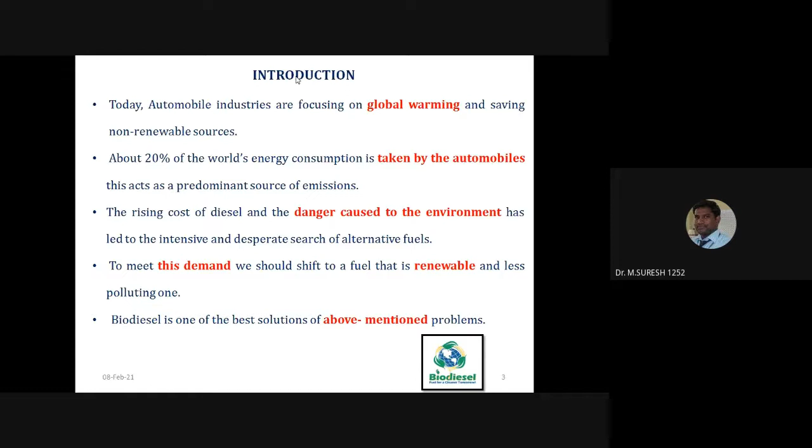Before using any kind of biodiesel, whether edible or non-edible oil, we have to find out the free fatty acid, that is, FFA content. Based on the FFA content only, we have to decide on the biodiesel production process. There are different methods which can be used for this production process, but among the major things we need to check is a titration process called free fatty acid determination.

Use of edible oil for the production of biodiesel can lead to food shortage and other problems. Therefore it is essential to search for non-conventional feedstock like non-edible oil. We need to use non-edible oil compared to edible oil, and also the cost of non-edible oil is very less compared to edible oil.

Huge consumption of fuel oil is outmatching the supply. So we need to switch over or use alternative fuels with properties that, if not identical, are at least comparable to petroleum based fuel. That becomes the need of the hour. So basically, biodiesel is the most promising among alternative fuels.

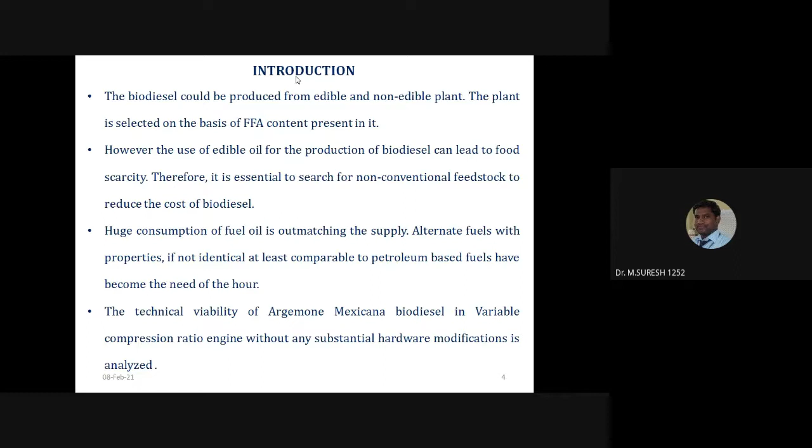Finally, the technical viability of Argemone Mexicana biodiesel in VCR engine. Normally all the research scholars and scientists are doing research in constant compression ratio, but especially for this research work, we focused on variable compression ratio without any modification, that means without any engine modification.

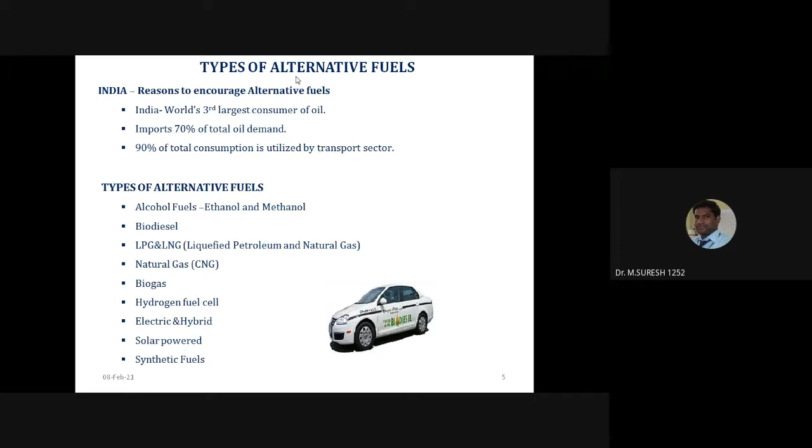The next slide shows different types of alternative fuels which can be used for internal combustion engines, and India's reasons to encourage alternative fuels. There are three things: India is the third largest consumer of oil, and also imports 70% of total oil demand. The next, 90% of total consumption is utilized by the transport sector.

We can look at different types of alternative fuels available, but mostly we have been using biodiesel without any engine modification, and also directly we can use it in diesel engines.

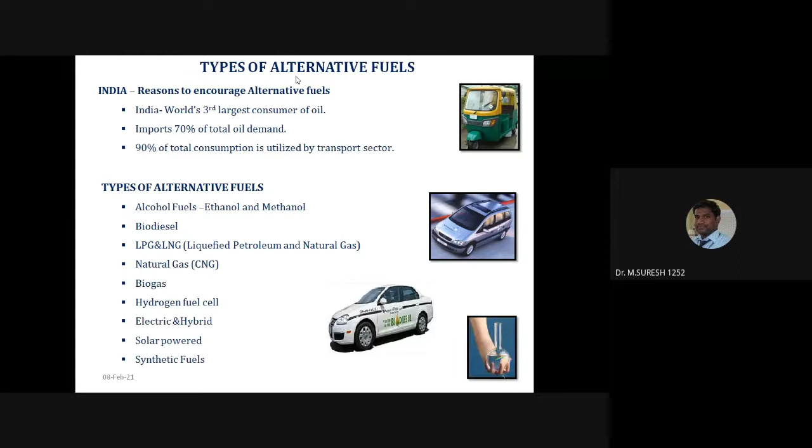This is the main research motivation. If you look at this research motivation, generally for biodiesel we can call it E3, which is nothing but Energy, Employment and Environment. So basically we need to focus on environment and also reduce the emissions.

We can see in this picture easily that if diesel or liquid fuels run on an internal combustion engine, after the exhaust stroke all the unwanted gas goes to the ventilation and those gases create more pollution to the environment. This more pollution affects health and causes global warming and ozone layer effects. To avoid these things, we need to switch over to biodiesel.

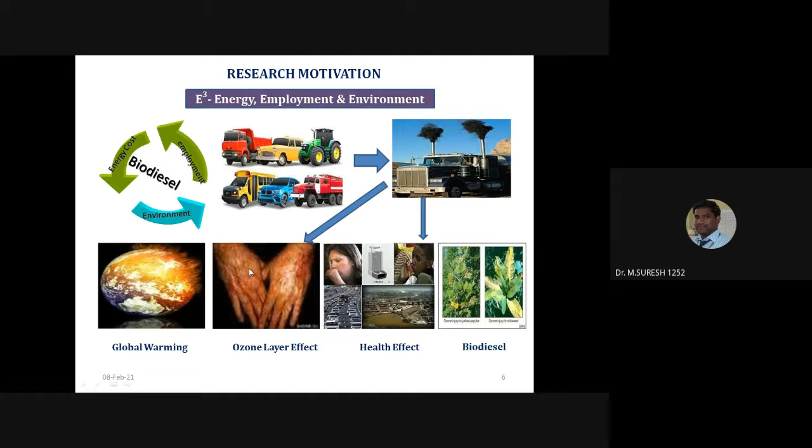General overview of biodiesel: as we all know, biodiesel is the name of a clean burning alternative fuel which can be produced from domestic or renewable sources. Biodiesel contains no petroleum, but it can be blended at any level with diesel to create a biodiesel blend.

Normally we have been using this biodiesel at B20%. If we use B20%, engine performance and emissions can be reduced, and combustion characteristics also get improved compared to other blending ratios. When we are going to use B100 or B50, we have to do some engine modification.

Generally for biodiesel, there are different methods to convert raw oil into pure biodiesel, but normally we use a chemical process called transesterification. Why do we use this transesterification process? Because it converts into two products, one is biodiesel and the other is glycerin. This glycerin we can use directly for the soap industry, and biodiesel we can use for internal combustion engines.

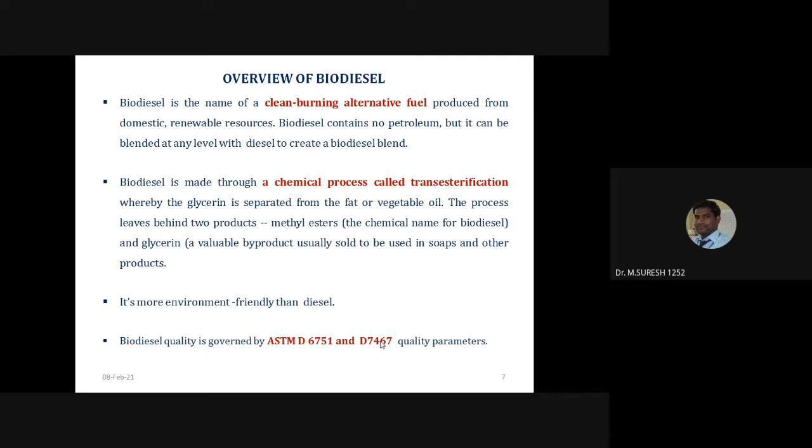If you look at advantages, first one is reduction in toxic engine emission, because biodiesel contains more oxygen. This leads to reduction in toxic engine emission, and also no sulfur dioxide emission, which means reduction in acid rain problem.

Then greater lubricity, which has improved engine performance and engine life. Also, because of the higher flash point of biodiesel, it provides improved safety of operation.

Other general advantages: it is non-toxic and biodegradable. Biodiesel is a renewable fuel, and it reduces exhaust emissions when compared to diesel fuel. Biodiesel is also safer to handle compared to diesel fuel.

There are some disadvantages which can be included in biodiesel: higher viscosity, lower energy content, higher cloud point and pour point, and greater engine wear.

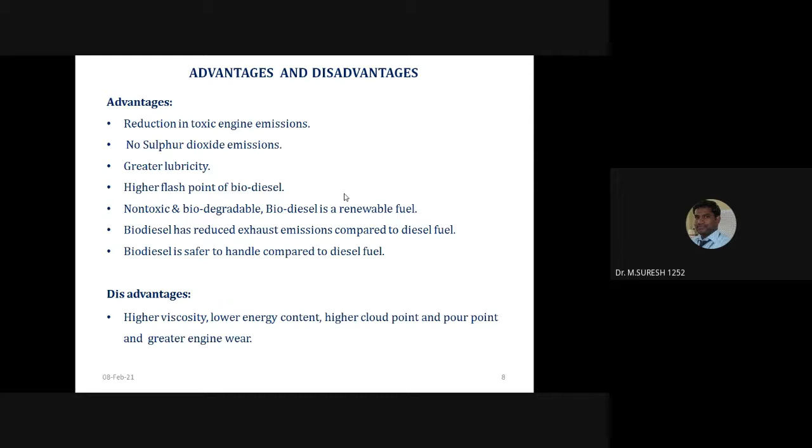If we use the trans-esterification process in biodiesel production, definitely viscosity may be reduced, and free fatty acid content will be reduced. Based on those two factors, we can do further processing and blending B10, B20, B30, or B100, whatever, so we can use it for internal combustion engines.

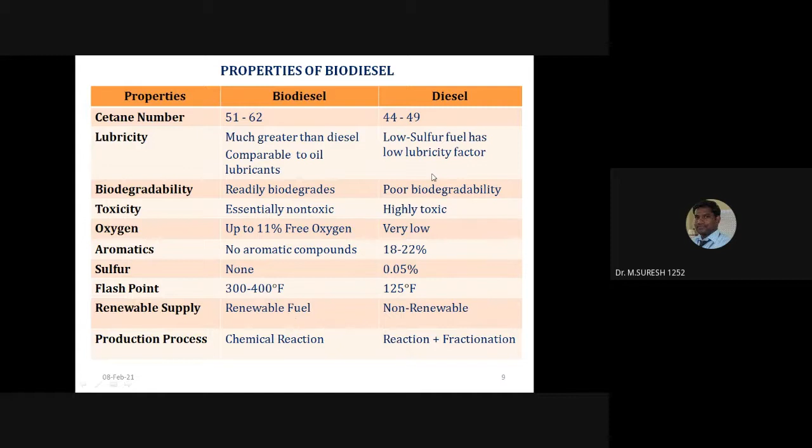We already know oils like jatropha oil, karanja oil, mahua oil, rice bran, neem, kusum, kokum, and sal oil. Out of all these oils, general research work has been carried out using constant compression ratio engines and also variable compression ratio engines.

From the inferences from the review of literature, we collected different papers through different sources, followed by reviewing all the journals. What is the main inference from this review, particularly for Argemone oil?

Looking at Argemone oil biodiesel, from the above research studies it's clear that biodiesel is one of the major alternative fuels which could be used for internal combustion engines with or without modification.

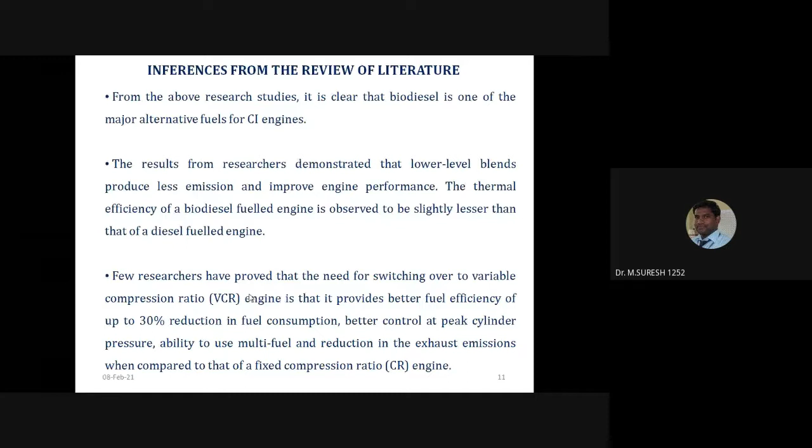This is the main significance of variable compression ratio, why we use it for internal combustion engines. With this technology we get better control of peak cylinder pressure, ability to use multi-fuel, and reduction in exhaust emission compared to fixed or constant compression ratio engines. There are also a few other inferences from the review of literature.

The research from the prior work clearly demonstrated that lower emissions were attained by the usage of biodiesel, except in the case of NOx, which slightly increased compared to diesel owing to the high peak temperature. It's also clearly shown that a VCR engine offers the potential to increase combustion efficiency and reduce the ignition delay under varying temperature,

and also other parameters such as ignition delay, pressure and cylinder crank angle. So we need to use variable compression ratio for biodiesel. It could be better to improve engine performance and also reduce engine emissions. Next, what is the reason behind that?

Argemone biodiesel. So Argemone Mexicana, or Mexican poppy. What is the need to choose this biodiesel for internal combustion? Those are the literature surveys and other factors. If you look at this Argemone Mexicana, it is locally available, grows with wild plants, can be grown on wasteland, is easy to propagate, and moreover this Argemone biodiesel will create employment opportunities for tribal people in tropical regions or

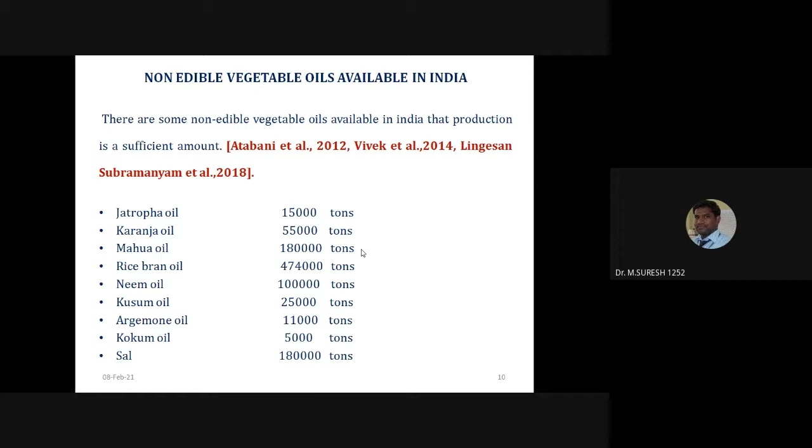There are different non-edible vegetable oils available in India. Those oils can be used for biodiesel. But the significant factor of this Argemone oil is that it gives very low free fatty acid compared to other non-edible oils. So when we use this Argemone biodiesel, it could help reduce biodiesel production cost and also improve engine performance as well as emissions.

Some key points have also been observed: biodiesel production from Argemone Mexicana will minimize the trade gap by reducing imported petroleum. It will become a channel of income generation for farmers by selling the seed, which is unwanted to the farmer. And other things like harvesting and slashing give great job opportunities for farmers in the process of cultivation.

So this is the main reason we chose Argemone seed, or Argemone biodiesel, which we directly used as fuel in the internal combustion engine. Before going into the production of Argemone, let's look at the variable compression ratio engine. You know constant compression ratio.

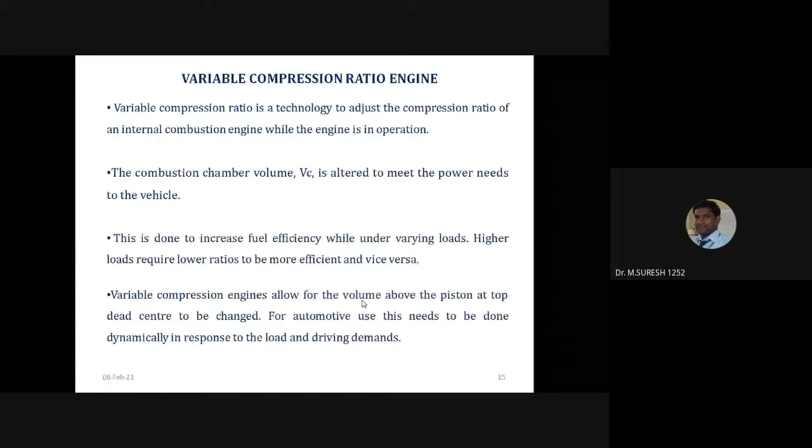Most research work is carried out using variable compression ratio because oil prices increase and car buyers have increasing interest in fuel economy. So in engine terms we should know about fuel economy. So it's better to switch over to variable compression ratio technology compared to constant.

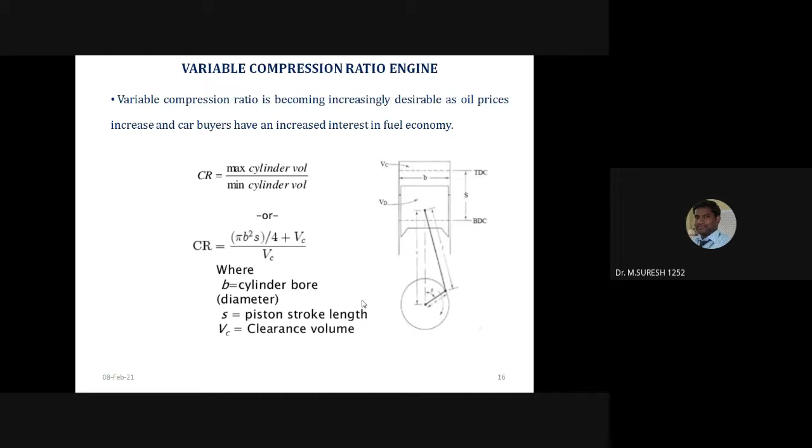If you look at the advantages of the VCR engine, the main reason for switching over to a VCR engine is that it provides better fuel efficiency, as we discussed, up to 30% reduction in fuel consumption, better control of peak cylinder pressure, and the ability to be a multi-fuel engine. A multi-fuel engine can directly use biodiesel and diesel, compared to constant compression ratio.

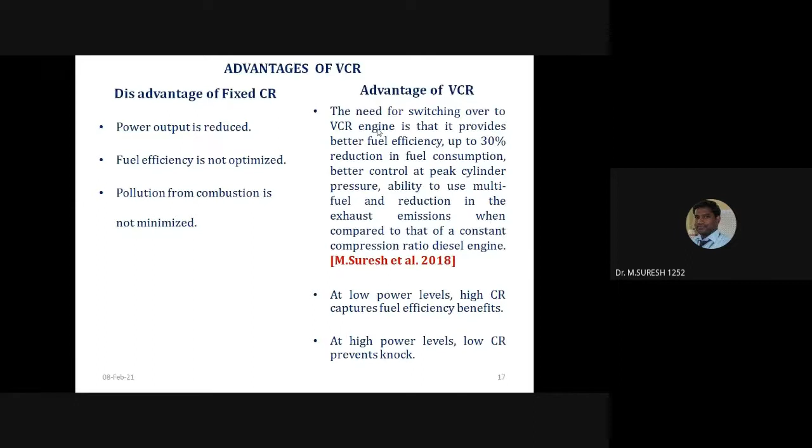And also we can look at some advantages of variable compression ratio. At low power levels, high CR produces a fuel efficiency benefit, and at high power levels, low CR prevents knock. So this is the main factor for using the new technology of variable compression ratio.

So this is also one kind of seed. From the seed we can get raw oil and convert it using different biodiesel production processes. Then finally we can use this Argemone mexicana biodiesel in a diesel engine. Argemone mexicana is also known as Mexican prickly poppy.

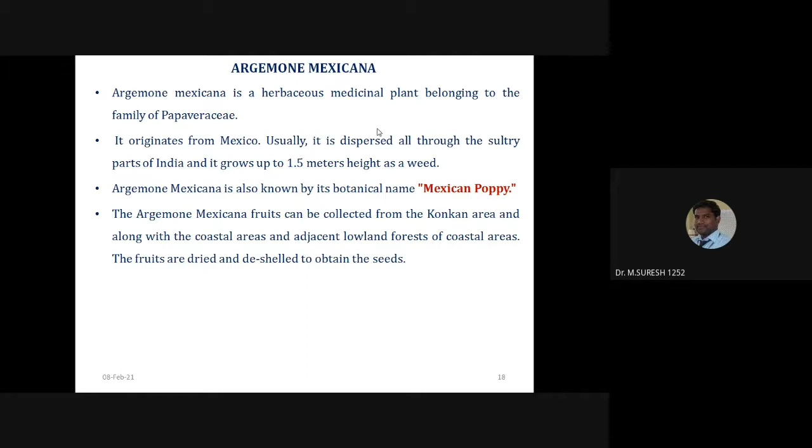Generally, Argemone mexicana fruits can be collected from the Konkan area. We collected fruits from Pune, and we converted them by the basic process we call the transesterification method, and we can use this fuel in an internal combustion engine. This is the significance of biodiesel from Mexican prickly poppy.

With the same oil, what we did was use a variable compression ratio engine, adjusting different parameters to find engine performance and emissions. That is the outline of the Argemone oil. Now we can enter the production of biodiesel.

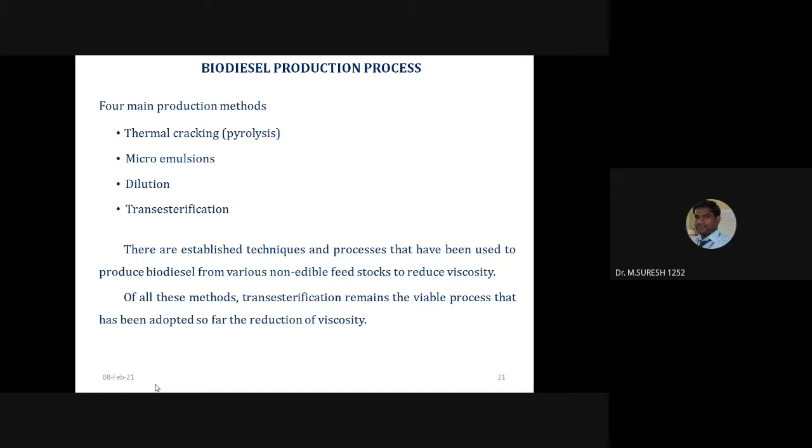So based on the reaction, the base catalyst reaction method could be used for the biodiesel production process. And this is the general transesterification process. If you look at the left side, any oil, like non-edible oil or edible oil, and alcohol. So we have to use an alcohol like methanol or ethanol.

So suppose we are going to use ethanol, we can produce biodiesel with bioethanol, or in case we are going to use methanol, we can produce biodiesel with methanol. So with respect to catalyst, normally we have been using NaOH and KOH for this biodiesel production. So you know KOH, caustic potash, and NaOH.

When compared to NaOH, KOH is more forgiving on high titration oils. With high titration oil, more yield is produced for biodiesel, and also high titration oils make a lot of soap. So that's why we have been using KOH as the catalyst instead of NaOH.

So what we mean by the transesterification process is the process in which edible or non-edible oil is allowed to chemically react with alcohol. So when we use oil or fat plus alcohol with any catalyst, we get two products. One is glycerin, the next one is pure biodiesel. So biodiesel is produced through a process known as transesterification. So this is the simple equation.

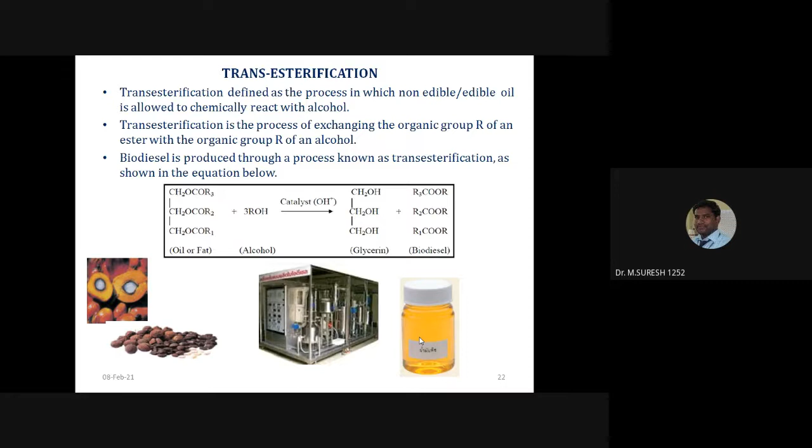And finally, pure biodiesel is produced by the various methods, and we analyze the properties of the diesel as well as the biodiesel. And this is the general preparation of the biodiesel. As I already told, when we add methanol, it is called methyl ester. When we add ethanol, the biodiesel is called ethyl ester.

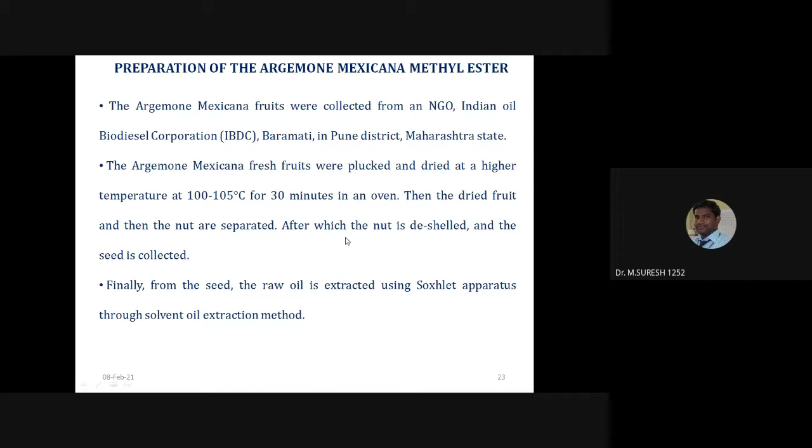So normally this seed we collected from Pune, from the Indian Biodiesel Corporation. It is located in the Baramati village area, and a temperature limit has been maintained. Initially the seed has been converted into raw oil. From the raw oil it has been converted into pure biodiesel by using the Soxhlet apparatus. By using this Soxhlet apparatus, we need to check the free fatty acid also.

So what do you mean by free fatty acid calculation? Before using any type of edible or non-edible oil for biodiesel, we need to check the free fatty acid. If we need to check the free fatty acid, which method do we have to use, based on the different types of biodiesel production? So for this biodiesel, we need to use the Soxhlet apparatus. After the Soxhlet apparatus, we found the free fatty acid value.

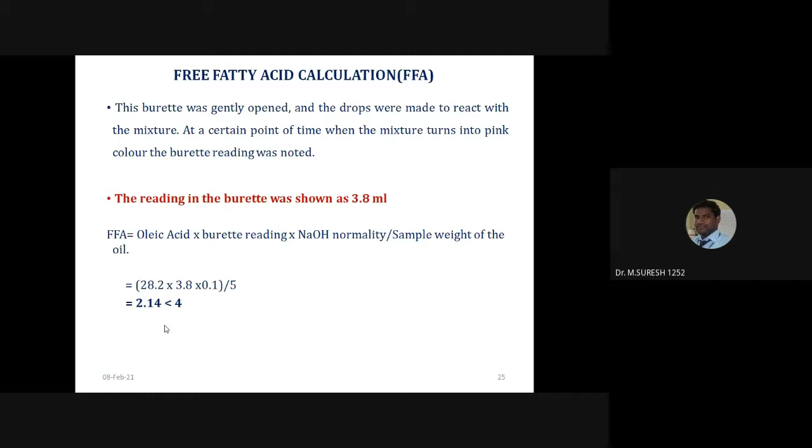In the free fatty acid calculation, we found 2.14. It should be less than 4, so directly we can use the base catalyst method. Above 4 means we have to go for a two-step process, acid catalyst method followed by base catalyst method. But compared with other non-edible oils, this oil gives very low free fatty acid, so we can directly use a single-step process.

And then there are four basic routes to produce biodiesel from oils or fats. The first one is base catalyst transesterification, and the next one is direct acid catalyst transesterification. Then conversion of the oil into its fatty acid and then into biodiesel. Then the fourth one, non-catalytic transesterification of oils and fats.

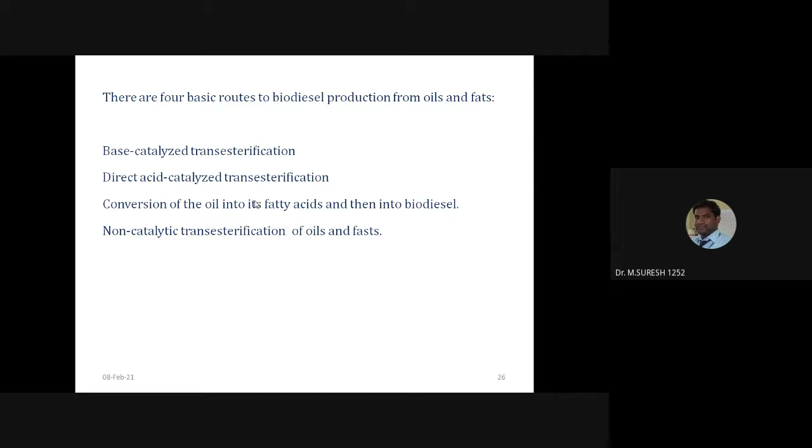So among the four methods, normally we have been using the first method based on free fatty acid. That's why I put in the first slide what is the need of free fatty acid. If more than 4, we need to go for the other steps. If less than 4, directly we can use the base catalyst transesterification method. So for this base catalyst transesterification method, if you look at this schematic diagram of biodiesel production, the extraction of oil and free fatty acid measurement.

So if the free fatty acid is less than 4, we can directly use the transesterification process. In case the free fatty acid is more than 4, we have to go for the esterification process. Then after the esterification process, we need to go for the transesterification process. But for this argemone oil, we can directly go for the transesterification process, and finally, based on the methanol recovery and other products we added, we get 2 products. One is glycerol, the next one is pure biodiesel.

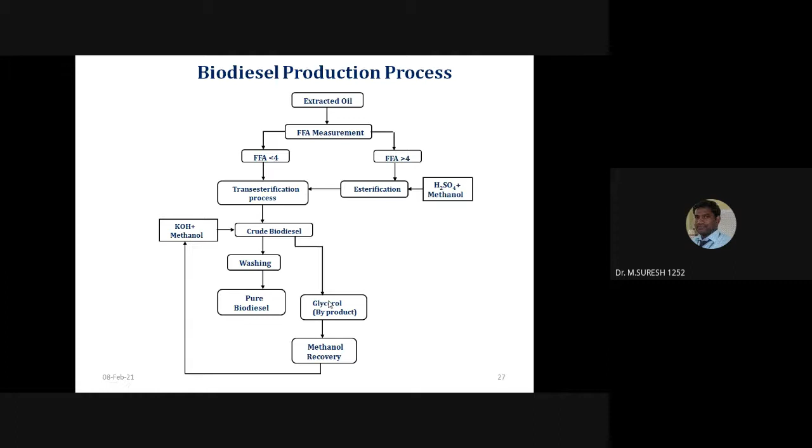And this is another schematic diagram of the production process. From the seed, it has been converted into raw oil. Using the Soxhlet apparatus, we need to convert that raw oil into pure biodiesel with the help of some approaches, which we can also discuss. With methanol and other catalysts, 2 layers are formed. One is biodiesel, the next one is glycerin. Based on washing, when we add water, pure biodiesel is one product and glycerin is a separate product. Glycerin can be used in the soap industry, biodiesel for internal combustion engines.

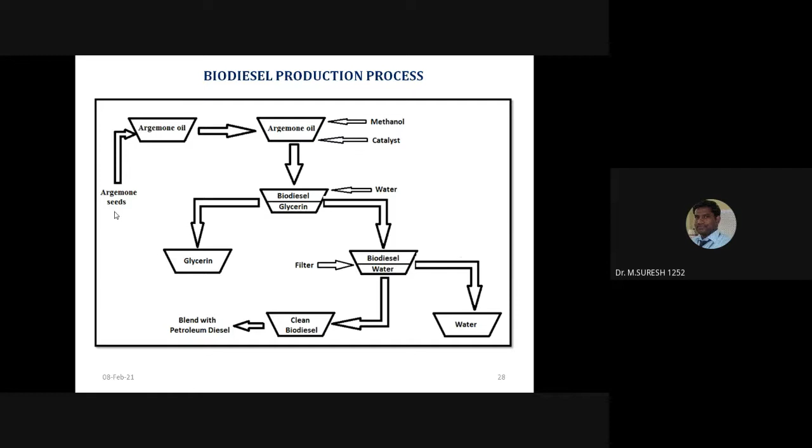And you see this fruit, argemone fruit. On the left side you can see the argemone fruit converted into seed, and then the seed converted into raw oil by using the solvent extraction method. Different extraction methods can be used, mechanical or chemical. But this solvent extraction method is more suitable to convert raw oil into pure biodiesel. And finally, we need to verify the blended proportion of biodiesel and diesel. If those properties match with diesel, we can use it for internal combustion engines.

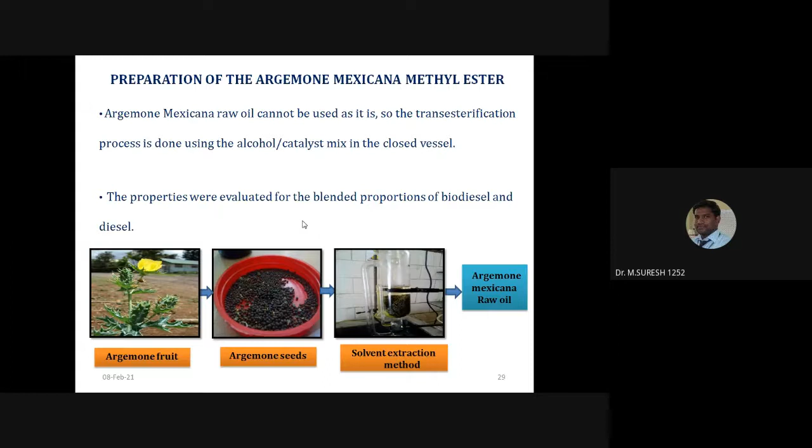And these are the chemicals used for the transesterification process: KOH, propyl alcohol, methanol, and oleic acid. Other chemicals we have also been using for biodiesel production. And this is the most important method of oil preparation after the transesterification process. We already informed about free fatty acid. Based on the free fatty acid, we have to go for the base-catalyzed production process. This base-catalyzed production process generally follows 6 steps.

One is mixing alcohol and catalyst. Next is the separation process. Next, biodiesel washing. Then alcohol removal. Then glycerin neutralization and product quality. Finally, we have to check product quality; if it matches the diesel property, we can use that particular biodiesel in a diesel engine directly without any engine modification.

Take, for example, the ratio of alcohol to oil, that means mixing of alcohol and catalyst. The alcohol can be methanol or ethanol, the catalyst KOH or NaOH, but we have been using KOH as the catalyst. The ratio of alcohol is 6:1. Normally a molar ratio of 6:1 is used in industrial processes to obtain methyl ester, meaning methyl alcohol biodiesel. The methyl ester may be produced at high yield, containing 98% to 99% biodiesel.

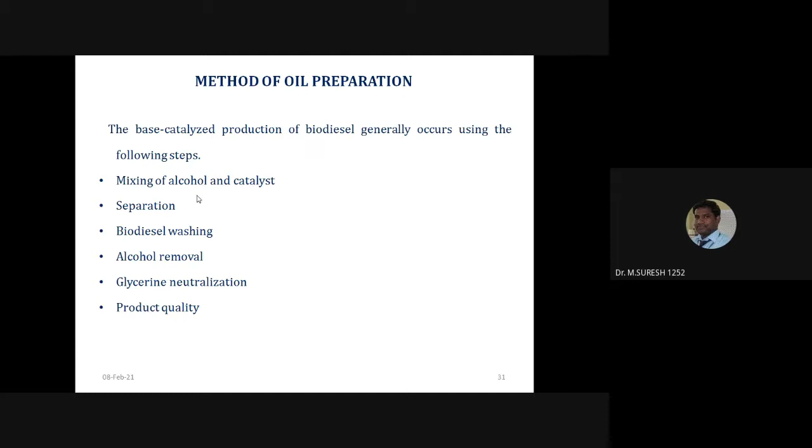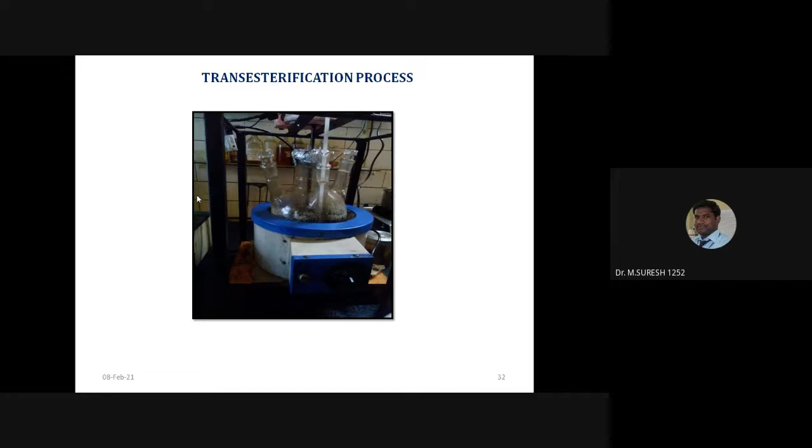A higher molar ratio of alcohol to vegetable oil may affect the separation of glycerol. A lower molar ratio requires more reaction time. So we need to use the optimum reaction time with respect to the ratio of alcohol. Like that we can use the different steps: separation process, biodiesel washing, alcohol removal and product quality. And this is the transesterification process. Normally we do the alcohol and catalyst process through different steps, and finally we get pure biodiesel.

This is the apparatus used for the transesterification process, and this is the glycerin separation process. After the transesterification process, the mixture is transferred to the separating flask. It is left to settle for 24 hours. After 24 hours, 2 layers form: one is biodiesel and the other is glycerin. The glycerin is removed from the separating flask, and the biodiesel we can use for internal combustion engines.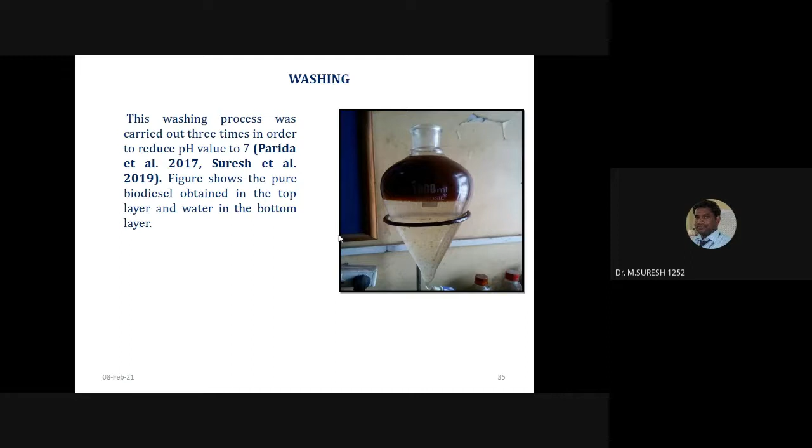So if the pH value is reduced to 7, we can get more biodiesel. If the pH value is reduced to 7, we get more biodiesel yield, and also we can get pure biodiesel. And this is pure biodiesel after converting through the production process, the trans-esterification process. These are the basic methods which have been assigned, and based on those methods we carried out this process.

Then finally we can analyze the cost of biodiesel production when compared to diesel. Nowadays, when compared to diesel and petrol, the cost is increasing day by day. Fuel prices have been increasing, 85 and 80 rupees. So it is more complicated to use those fuels in internal combustion engines. So we need raw materials such as catalysts, methanol, NaOH, H2SO4, and a production process with 3 steps which can be used or analyzed.

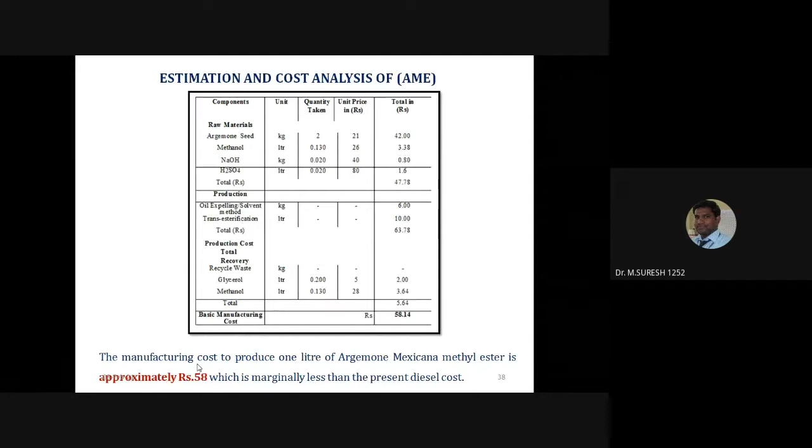So the manufacturing cost to produce 1 liter of Argemone Mexicana methyl ester is approximately 58 rupees, which is marginally less than the present diesel cost. The present diesel cost is 80 or 81 rupees. That depends upon the state; the cost of fuels may vary.

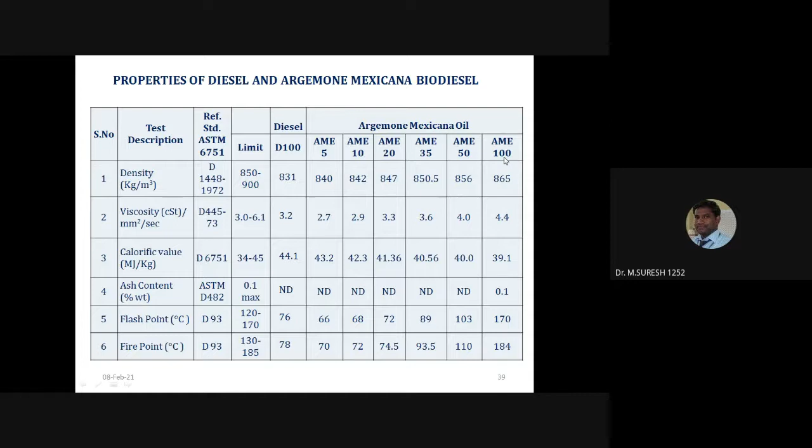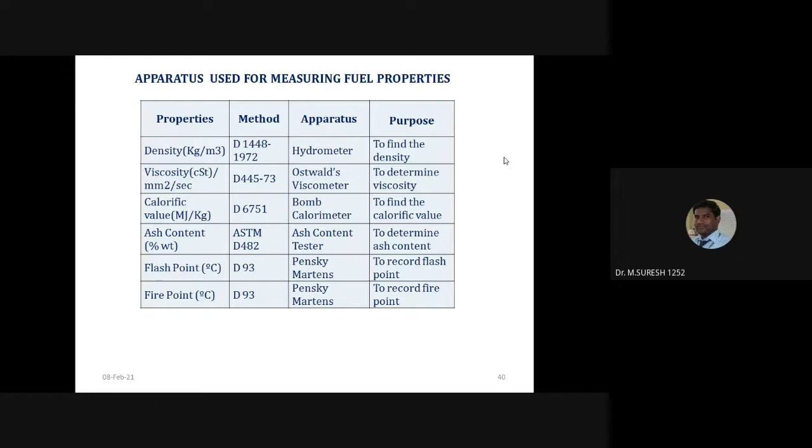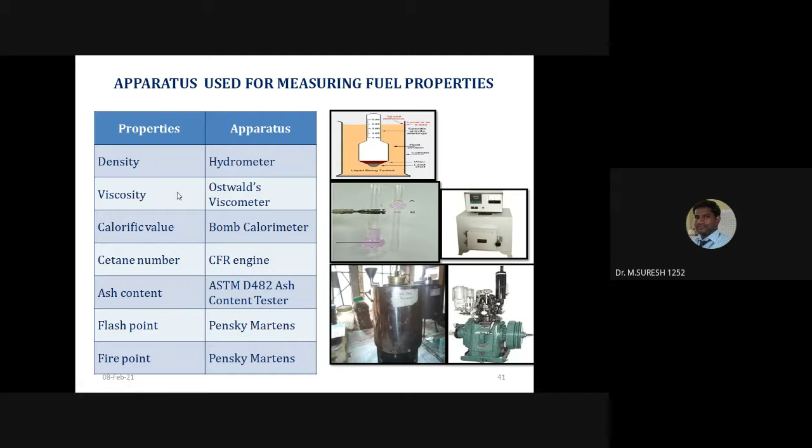And these are the general properties of diesel and Argemone Mexicana biodiesel. Compared to ASTM D6751, the limits have been assigned for diesel and blends of 5, 10, 20, 35, 50, 100, which could be used for internal combustion engines. And these are the apparatus used for measuring the fuel properties: density, viscosity, calorific value, ash and flash point. Some apparatus, you can see: hydrometer for density, viscosity, calorific value, cetane number, ash and flash point. Those properties are essential for engine torque and performance.

So we saw a broad idea of the production of biodiesel from Argemone Mexicana oil, various methods, and the classification we have been using for non-edible and edible oils. When compared to other non-edible and edible oils, we find that the properties are most important. If the properties match those of diesel, we can use it for internal combustion engines.

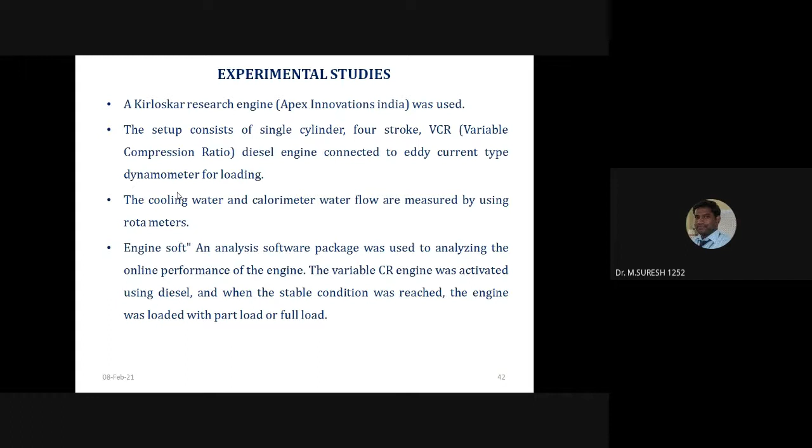And now a few things about the engine tests. After converting this biodiesel, it was directly used as fuel in a variable compression ratio engine, that is a Kirloskar research engine, manufactured by Apex Innovations. It is a 4-stroke variable compression ratio engine connected to an eddy current dynamometer. It has also been provided with engine soft analysis that may be used to detect the engine torques.

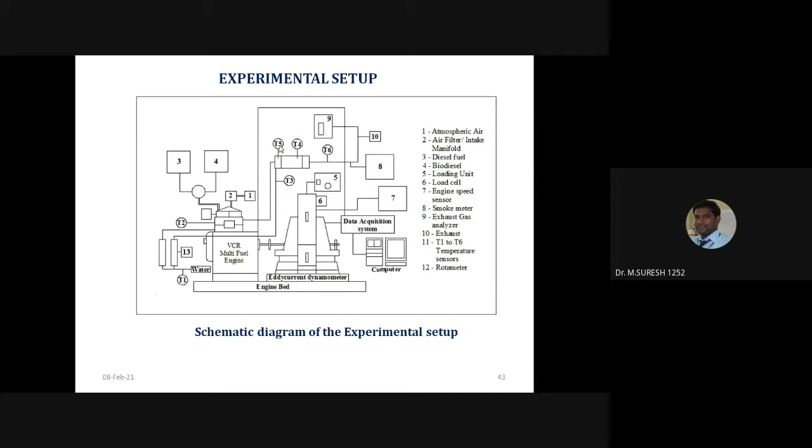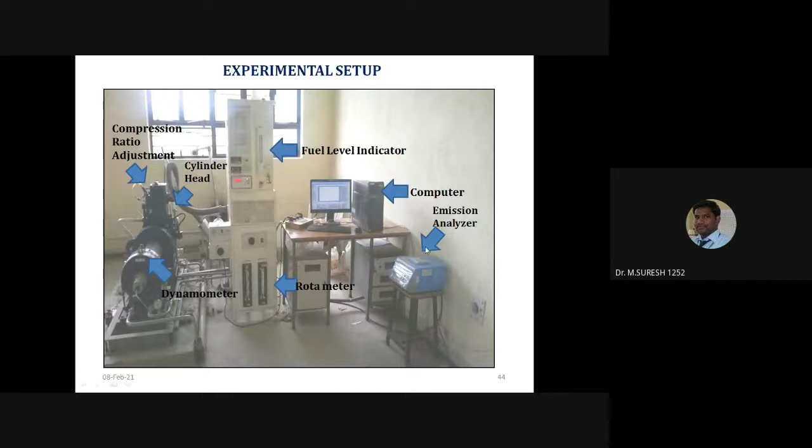And the engine was mounted on the bed in the test cell. The CR, compression ratio, can be changed without stopping the engine and without altering the combustion chamber. So these are the basics of the experimental studies, and this is the experimental setup used, a multi-fuel VCR engine: compression ratio adjustment, cylinder head, dynamometer, rotameter, and computer connected with the engine, and the emission analyzer, fuel indicator.

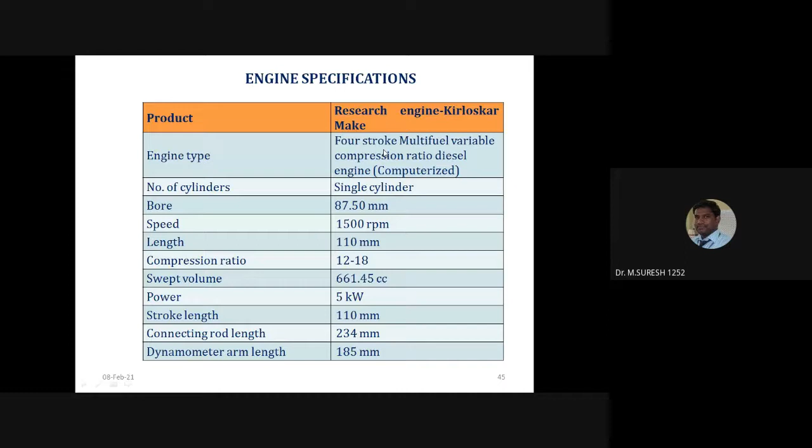And these are the engine specifications: bore, speed, length, compression ratio varying, power, and the engine type. You can see the 4-stroke multi-fuel variable compression ratio computerized engine. The most important thing for constant compression ratio is that we have to adjust one compression ratio, either 12, 13, 14, 15, 16 or 17. Then that is compared with this variable compression ratio method.

There are different methods which could be used to vary the variable compression ratio. Among these is the moving cylinder head method, which could be used without stopping the engine.

Suppose initially we are going to take a reading at CR 15, so we have to take the reading. Then, without stopping the engine, we have to adjust it using the moving cylinder head method.

You can also see variation of combustion chamber volume, variation of piston deck height, modification of connecting rod geometry, and moving the crankshaft axis based on the design of the engine.

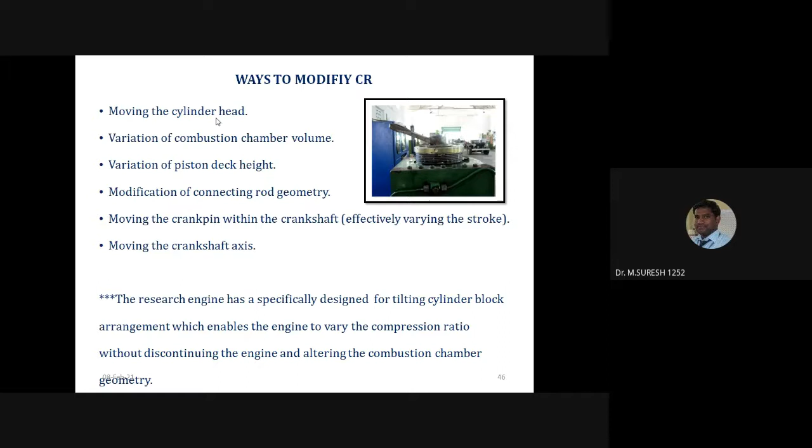So out of these, the moving cylinder head method has been used to vary the compression ratio, because without stopping the engine, and considering design factors and cost analysis, it's cheaper compared to the other methods.

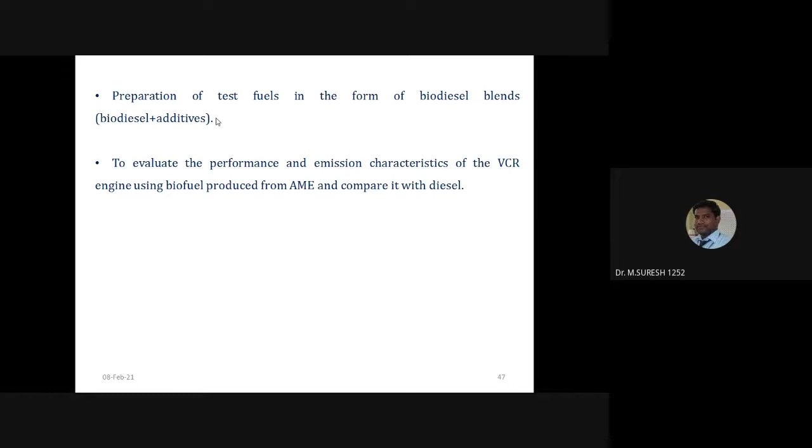Generally, in experimental analysis, after testing the properties we need to check the engine terms and also emissions compared to diesel fuel.

This is the methodology used for this Argemone oil. Compression ratio varied from 14 to 18, at different points of evaluation, and biodiesel blends used were B5, B10, B20, B35, B50, and 100, after the conversion and production of biodiesel.

This last one is what we used for uncertainty analysis, which was plus or minus 1% in all cases, in terms of various engine performance and emission factors.

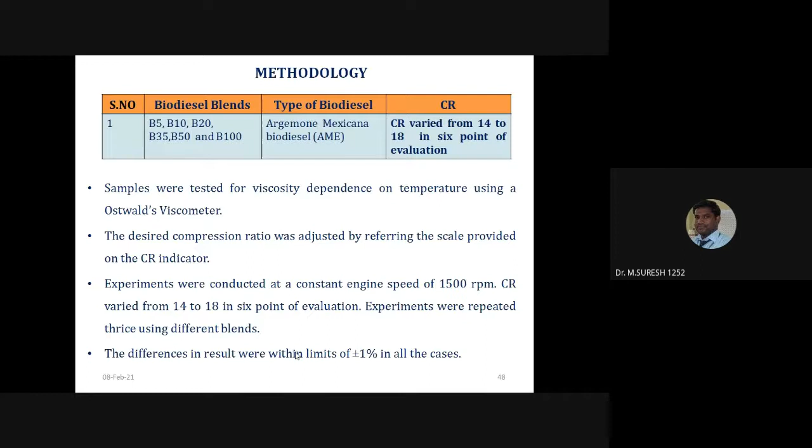Results and discussion: if you look at that, does anybody know about engine terms and engine performance? What are the characteristics to be included in engine performance?

Suppose we are going to use biodiesel in an internal combustion engine. After the production process, we need to check the properties of the biodiesel and diesel, then mix or blend them in some proportion like B5, B10, B20, whatever.

These are the basic things of engine performance characteristics. Does anybody know about engine performance characteristics, or have any idea about performance parameters?

Brake efficiency, mechanical efficiency, air standard efficiency, any other parameters? So if you look at performance parameters, in terms of mean effective pressure, brake mean effective pressure, indicated...

Then other factors: indicated power, brake power, frictional power, and specific fuel consumption in terms of SFC, specific energy consumption, and also thermal efficiency, mechanical efficiency, volumetric efficiency, exhaust temperature. These are all the factors to be analyzed for engine performance parameters related to biodiesel properties.

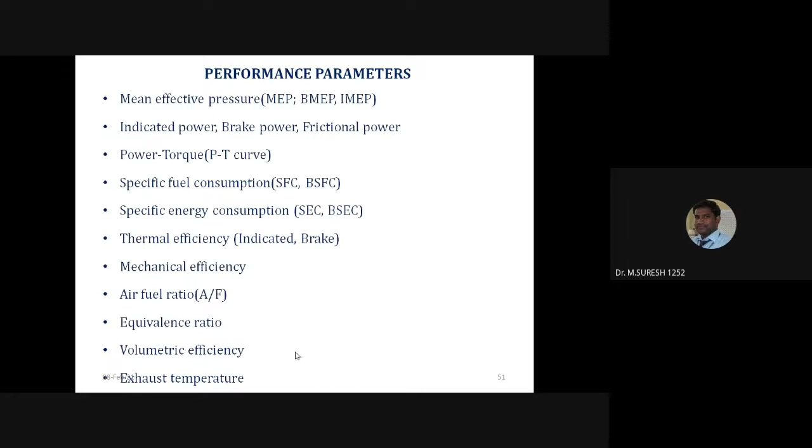Now looking at SFC, we'll move on quickly since there's a time limit. SFC is the ratio of fuel consumption per unit time to the power developed by the engine.

This figure shows the variation of SFC for different compression ratios. The X-axis shows different compression ratios, and the Y-axis shows SFC, in terms of various blends: diesel 100, AME 5, AME 10, 20, 35, 50, and 100.

When compared to other blends and diesel, AME 20 at compression ratio 17 gives better results, because of the fuel density, viscosity, and heating value of the fuels. That's why I said fuel properties are most important, after we use the production of biodiesel.

By using the transesterification method, it would be better compared to other things. It can also be observed that the SFC decreased by 10% compared to diesel at CR 17.

This diamond shape represents diesel. Compared to diesel, 10% of the SFC finished. Based on the literature survey, engine with higher SFC means more fuel is required. It's observed from literature that lesser value of SFC is required for better performance of the engine.

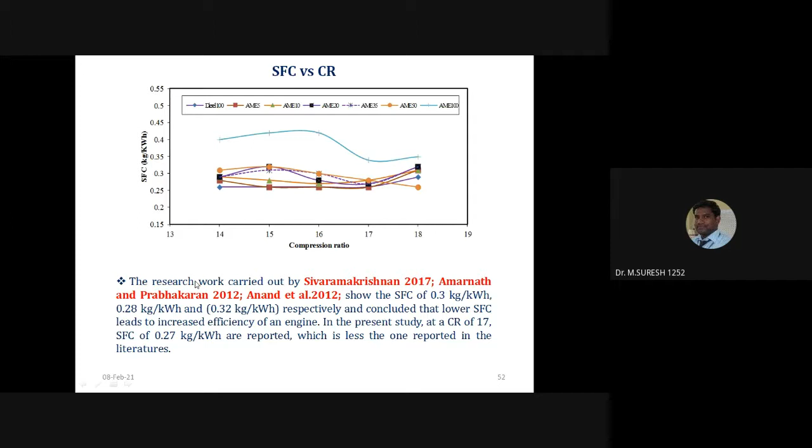According to research carried out by many authors using other non-edible oils with the same compression ratio and same blending, when compared to those researchers, this oil produced very less specific fuel consumption, like 0.27, compared to 0.3, 0.32, 0.28. So compared to other research on non-edible oil, this oil produced very less fuel consumption with the same blending and compression ratio.

This is brake thermal efficiency, a term used for how the engine transfers the chemical energy of the fuel into useful work. This shows the variation of brake thermal efficiency for different compression ratios or different blends at maximum load, taken at 100% load. The blend has been increased with the CR in terms of power developed and also reduced heat losses, so inside the engine some heat losses may be reduced.

We also observe that the brake thermal efficiency of blend AME20, specifically AME20 CR17, attains maximum brake thermal efficiency. This brake thermal efficiency compared to other research work is almost equal to other non-edible oils.

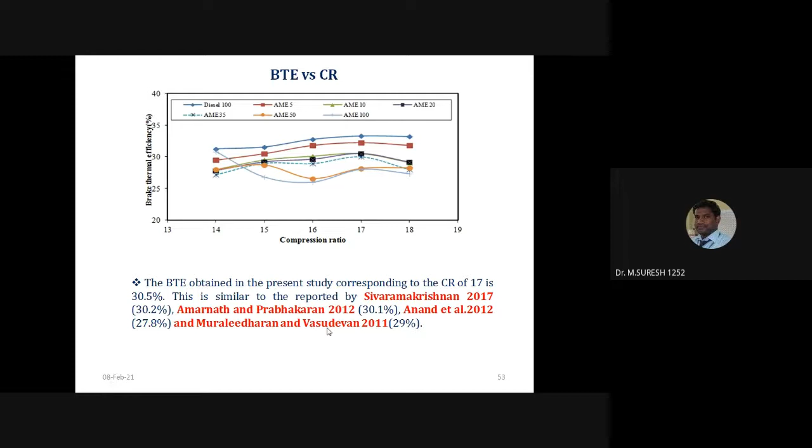For emission characteristics, these are the characteristics we found using this Argemone biodiesel. We couldn't cover all characteristics like equivalence ratio, volumetric efficiency, exhaust temperature, air-fuel ratio, and mechanical efficiency. Only some engine-related characteristics were found.

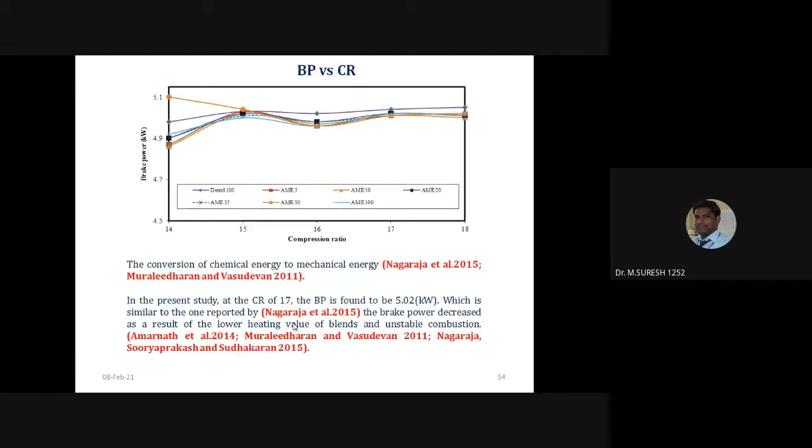Followed by emission characteristics, general emissions produced by both diesel and petrol include carbon monoxide, carbon dioxide, hydrocarbon, and NOx. Especially for this biodiesel, we need to control NOx.

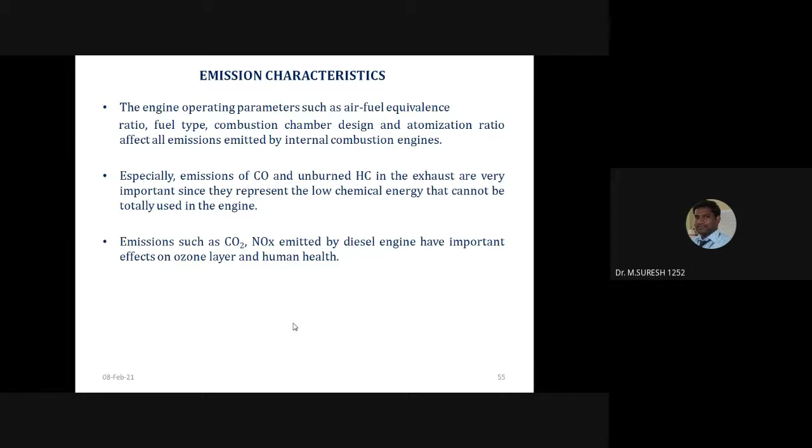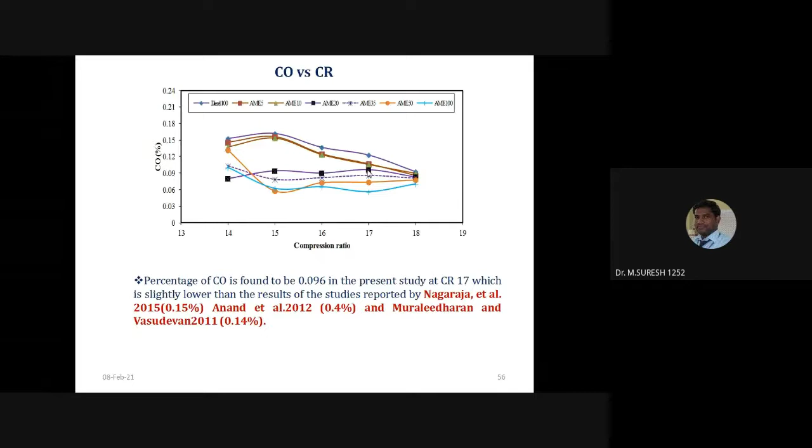Next is hydrocarbon emission versus CR. This emission product is produced by unburned hydrocarbon from diesel, where the fuel is either completely unburned or only partially burned. The unburned hydrocarbon in the exhaust decreases with increasing amount of biodiesel in the blend, due to the built-in oxygen content percentage in the molecular structure.

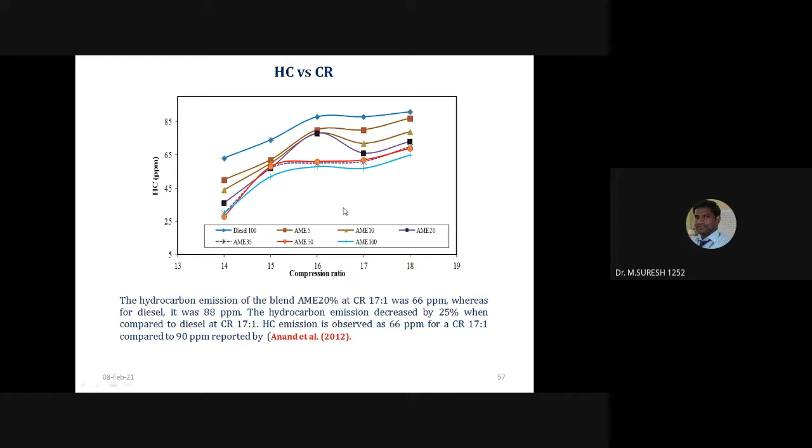We also discussed general properties of biodiesel like fuel viscosity, density, and other factors. Because of the longer ignition delay, the accumulation of fuel in the combustion chamber may increase hydrocarbon emission. But as shown in this image, AME20 at a certain CR produces very low emission compared to other biodiesel blends and diesel.

For NOx, mainly for this biodiesel we can control the NOx emission. After using Argemone biodiesel, with AME20 at CR17, we observed reduced NOx emission compared to other blends as well as diesel.

Experimental results show that exhaust temperature decreases. If exhaust temperature increases, NOx emission also increases. So if exhaust temperature decreases with increasing biodiesel blend ratio, this leads to decrease in NOx formation - this is what we achieved with AME20. Exhaust temperature decreases and biodiesel content produces more oxygen during the process, so NOx emission decreases compared to other non-edible oils studied by other researchers.

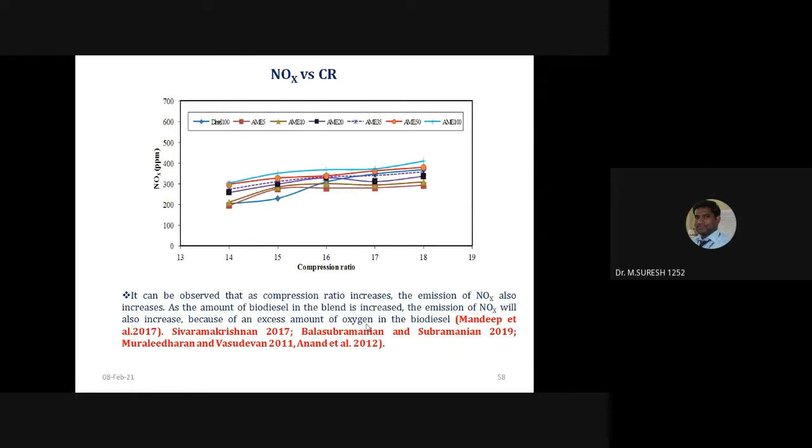And regarding emissions, do you know why we have been using BS6 compared to BS4? Anybody?

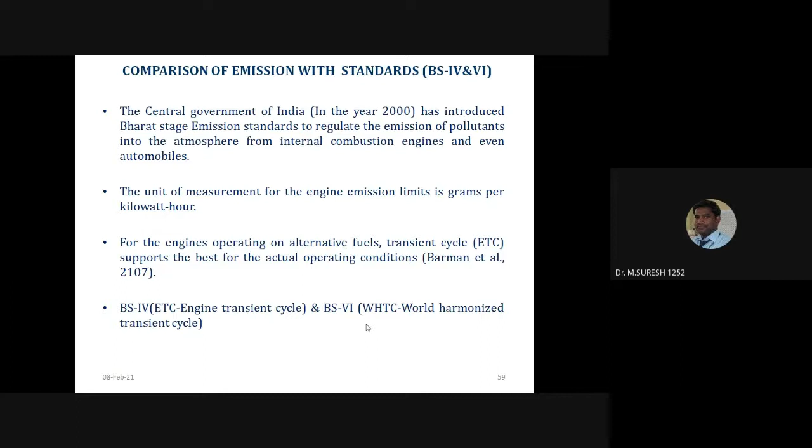In BS6 norms, onboard diagnosis has been made mandatory for all vehicles, and also BS6 grade fuel and BS4 grade fuel differ in terms of sulfur and NOx. So sulfur and NOx will be reduced when compared to BS4, which is why we need to use BS6 norms.

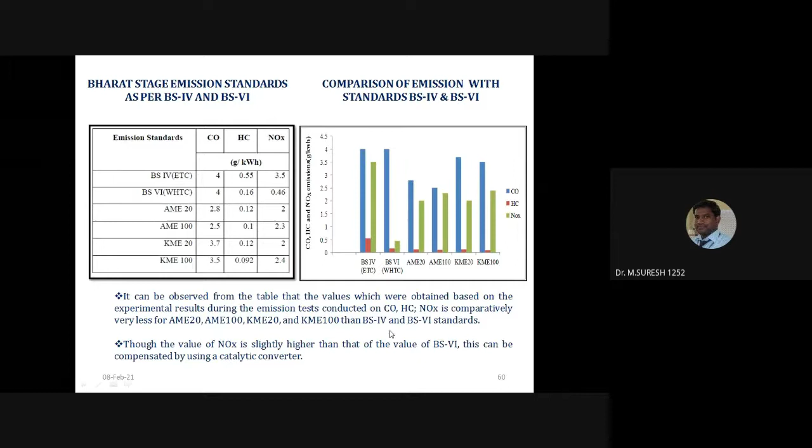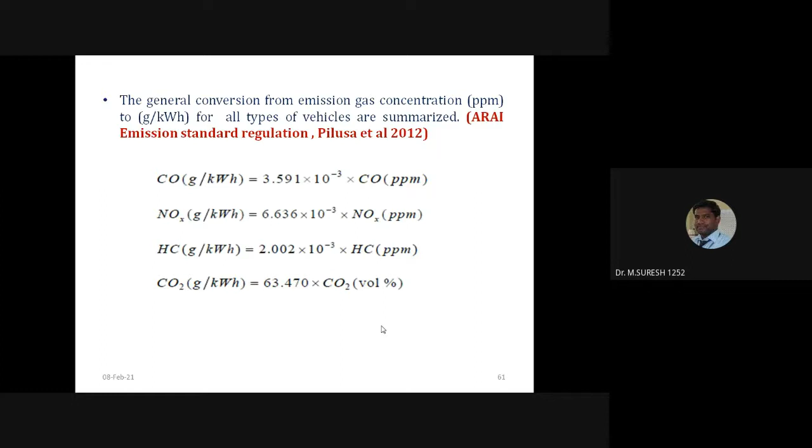We can also use ARAI emission standard regulations. And the conclusions based on Argemone biodiesel: production of Argemone biodiesel through the transesterification process, we obtained a molar ratio of 6:1 and temperature value of 60 to 65 Celsius.

Based on the production of biodiesel, the manufacturing cost to produce 1 liter of Argemone Mexicana biodiesel is approximately 58 rupees, which is less cost when compared to diesel and petrol.

But if we were to use this fuel in petrol, we would have to modify the exhaust system and intake system. So both properties of diesel and biodiesel should be similar, which is why we have been using this biodiesel directly in a diesel engine.

We can find this AME, Argemone Mexicana biodiesel, methyl ester, because in the production of biodiesel we used methanol. So that is what we have used. Argemone methyl ester blend at 20% was found better than diesel.

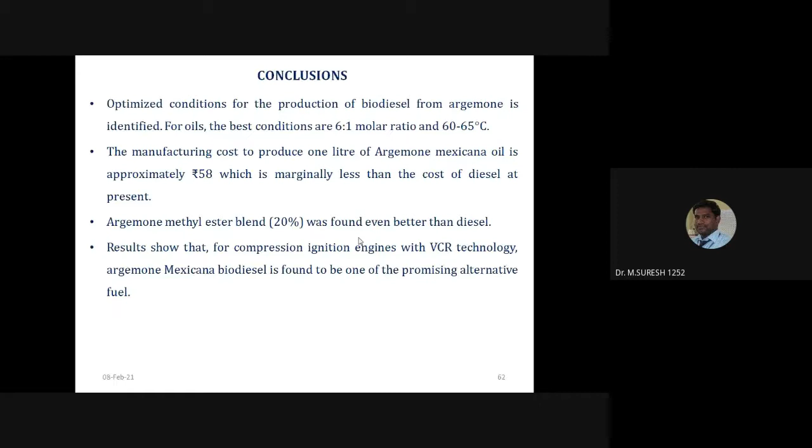Also, VCR engine technology is a promising technology for using alternative fuels, in terms of SFC and brake thermal efficiency, compared to other factors like compression ratio. So the optimum compression ratio we found was based on adjusting the variable compression ratio, compared to constant compression ratio.

Also, AME blend shows better engine performance together with a reduction in emission levels of CO, hydrocarbon, and NOx compared to diesel. This is the significance of the variable compression ratio method used for this particular oil when compared to constant compression ratio, and also why the transesterification process is used for biodiesel production.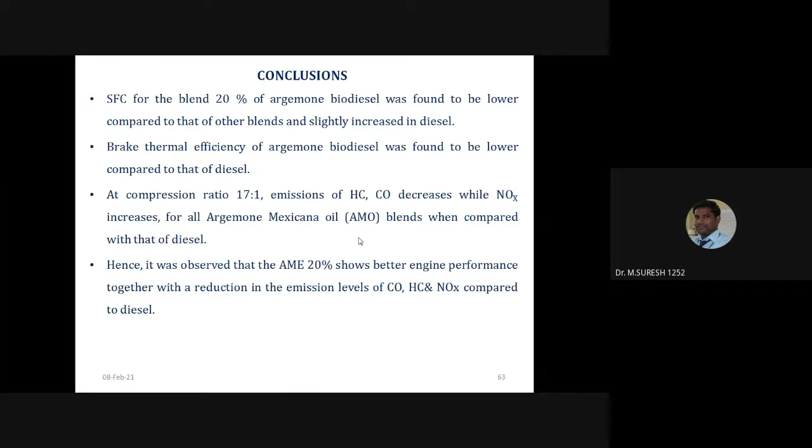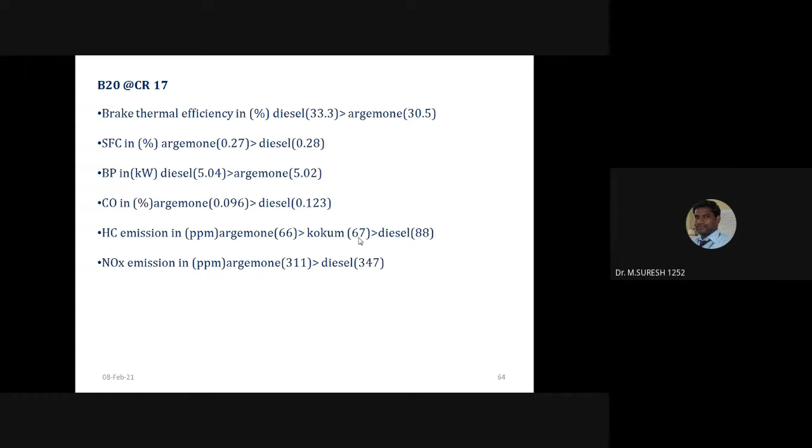This is the leading biodiesel producers worldwide, which has been changing year-wise. Biodiesel producers include the US, Brazil, Germany, China, Argentina, France, Indonesia, Canada, Thailand, Colombia, and also India is leading in producing biodiesel for various purposes.

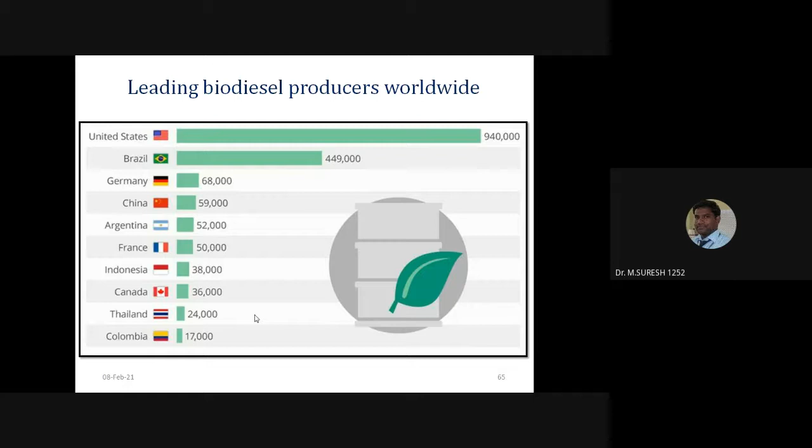Again, I want to share that the transesterification method is the most reliable technique for the removal process of biodiesel compared to others, because it requires low pressure and low temperature. Biodiesel yield produced is more, with quick response time, low thickness, easy operation, easy accessibility, and it's economical. This is why we use transesterification method compared to dilution method, thermal cracking method, pyrolysis method, and direct method.